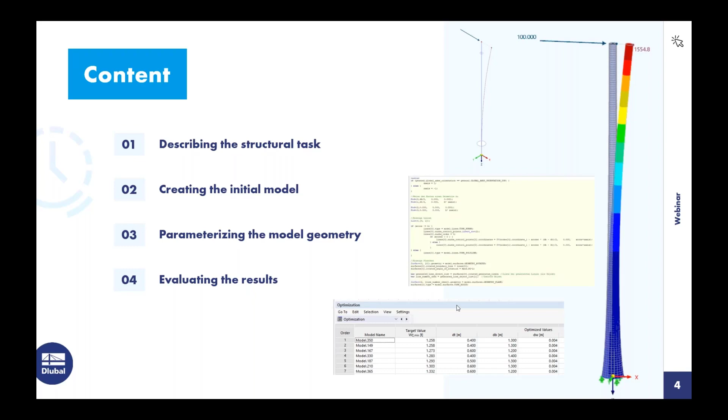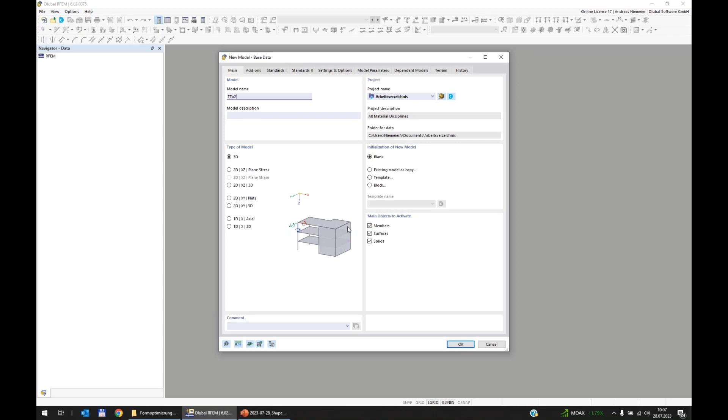I use a 3D model with all elements. The Z-axis goes down, but that's irrelevant for this task. What's more important is what our calculation tasks are.

Because we're talking today about optimization, I turn on the optimization add-on. You see here it's not just an optimization add-on, but more or less an optimization and cost CO2 emission estimation tool. A quite long name, with a lot of information. Why we also mention costs and emissions here, I'll tell you later.

For costs, you also have to define not directly a unit but more a currency, because we don't really have a place for it, so we define it here. For example, we use euro, and it should be written behind the value, but this is only organizational stuff.

What's more important, as I described with my structural task with this tower structure, is the target to find a structure with minimum weight. The question is, what are my limits? We can say it's deflection according to any standard, or yield stress, or whatever.

So it's your turn to decide which design checks you activate here. If we activate stress strain, the optimization considers stress strain. If I also activate steel design, it also considers steel design according to the standard you check here. So it's really powerful what you do here.

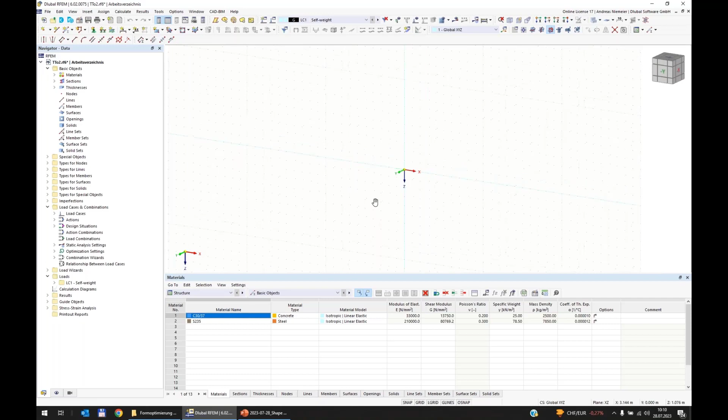So I use my XZ plane. I model the structural element, this 15-meter long structural element, only by a line. I don't define any cross section or anything else, because this is open at the moment. I only define what is given.

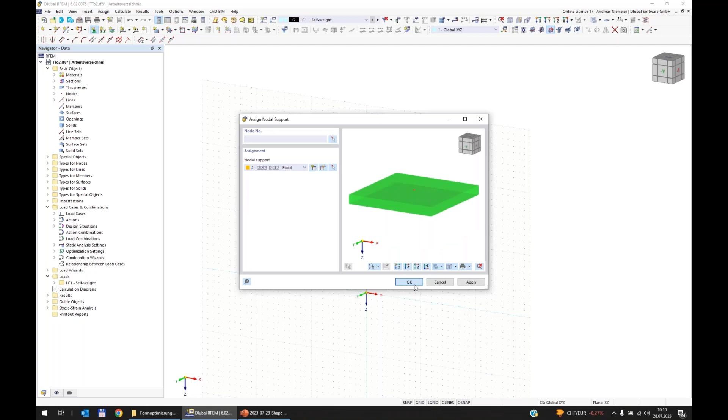We have some clamping on the bottom, let's say a fully compatible support. So I take over bending moment, shear forces, normal axial forces, all three forces, and three rotations should be fixed here on the bottom. Then we have a shear force on top, 100 kilonewton.

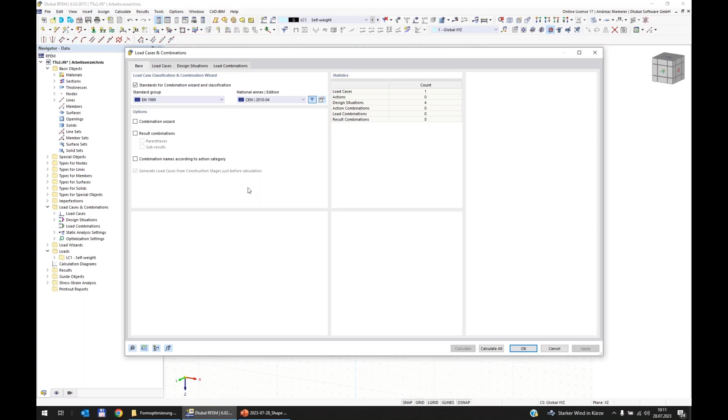For this, I define a load case, load combination scheme. I open the load case combination settings and start from the base tab. Here I deactivate the wizard because for my task today I only want to optimize it for the 100 kilonewton shear force on top. Of course we can use more, but it only eats more time. For showing you the logic, it's absolutely okay.

The next is, of course, load case. We give it a name, maybe horizontal load. We deactivate self-weight because this is uninteresting for this demo. We say, for example, here it's coming from wind.

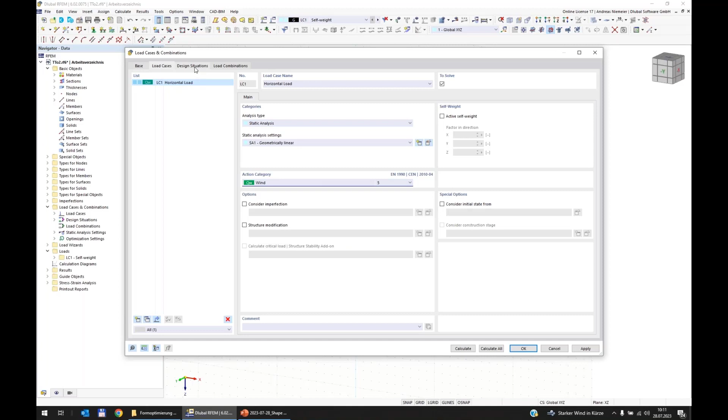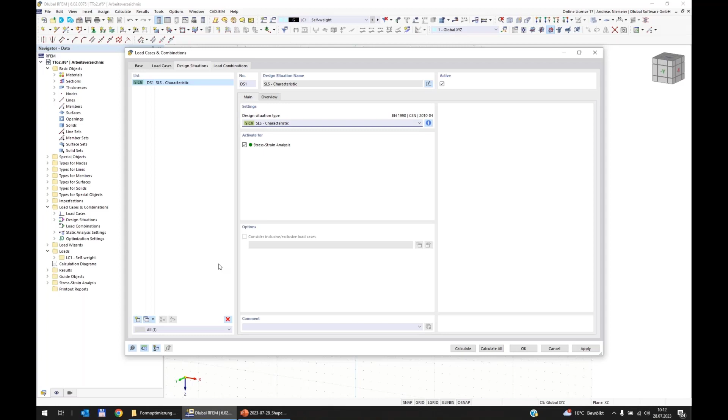Now we create a design situation for the stress check. Here I delete the standard created stuff and create a new design situation, characteristic one, where I activate the stress strain check. This means every load combination under the topic DS1 will be checked according to stress strain. And here I place one, so I create one load combination, a linear one, geometrically linear, considering load case 1. So this is everything we're doing here, and confirm the setting.

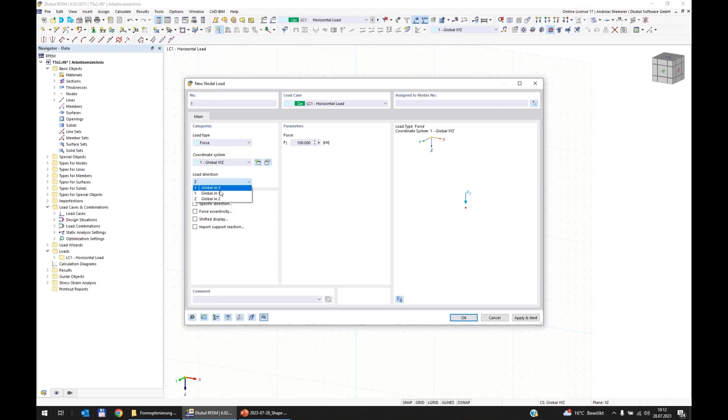And now we can specify the load, 100 kilonewton, in load case 1, into the right direction in X, for example. Of course you can consider more, but this only makes it more complex.

So now we have modeled all boundaries: the restrainment on the bottom, the force, and the length of 15 meters. Now we can start creating or modeling stiffness, how we can transport the force here from the air to the bottom. So as an engineer, I would say let's place a member in a structural finite element program.

So this is the easiest task. I go into the properties of the line and assign a member here. The program opens the member dialog for me, asking for some information about the member. Of course, I can use a cable here, but that makes no sense. So I take a beam, which can transfer all forces in all directions.

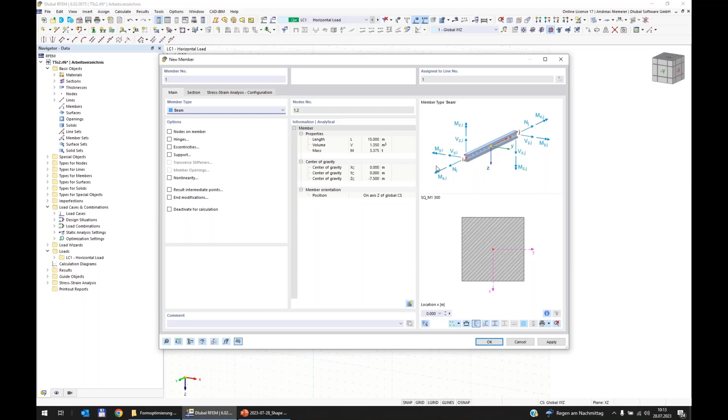And in the next tab, I define the cross section. Of course, I don't want a concrete cross section here. I want some circular hollow section, as was written in my structural task.

So here I specify first the material. I open the library, delete the filter, and write, for example, S355 material according to Eurocode, and I select this steel because it has, for my task, a good yield strength where I can go to the upper limit, and this is maybe my condition for my optimization.

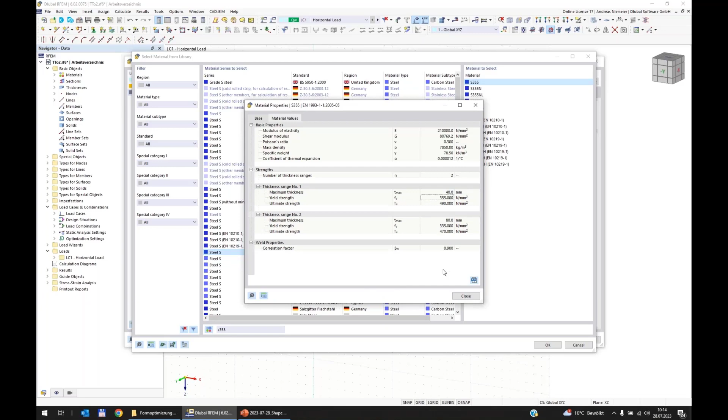Of course, I can also optimize different materials if you see this long list, but I fix this as a fixed variant. So I select steel, and now we assign a cross section, a circular hollow tube section from steel. Now we come to the first point, the plans, where we have to define two properties: a diameter and a thickness.

The question is, what should I change? The thickness or the diameter, or is this already enough? Should I increase it, decrease it? I don't really know, let's say. This is the first point where we, as regular users of the program, do some optimization.

What I would do now is, I know we have 100 kilonewton on top and the length of the tower is 15 meters. So I expect a bending moment on the bottom of 1,500 kilonewton meters. This 1,500 kilonewton meters, I believe, is really deciding for this structure. So we should find a cross section that can withstand or carry this load.

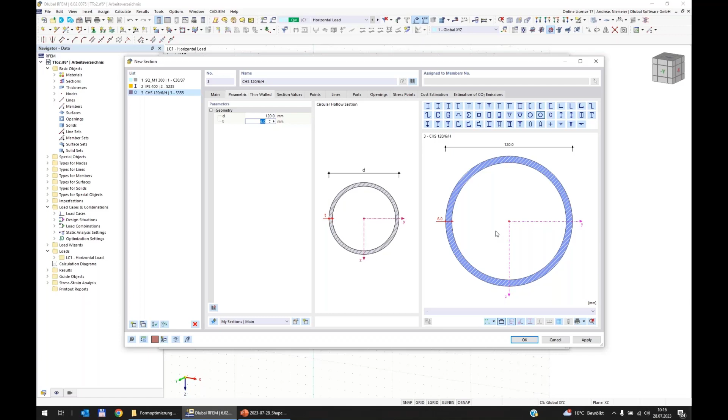Now the question again, I don't know if this cross section with 120 millimeters and 6 millimeter thickness can carry the 1,500 kilonewton meters. Here we have a small feature implemented, what is really not visible, but is really helpful. For this, I increase the dialog so you see everything. And maybe you realized here is a list box.

If I pick it, we have much more stuff here. The program offers unit stresses for different load types: bending moments, torsional moments, warping moments. In my case, it's the bending moment that's interesting. Let's say the bending moment about the z-axis, Mz, for 1 kilonewton meter, and I get a stress layout if I apply 1 kilonewton meter on this cross section. You see we get a compression of 70 Newton per square millimeter and here tension of 70 Newton per square millimeter. This information helps me find a cross section for this 1,500.

So if we know we have a yield stress of 355 Newton per square millimeter, and I divide this by 1,500 kilonewton meter, I get a new unit stress of, let's say, 0.23, 0.24, around about. In this case, we have 70, which is much bigger. So this cross section cannot handle this 1,500.

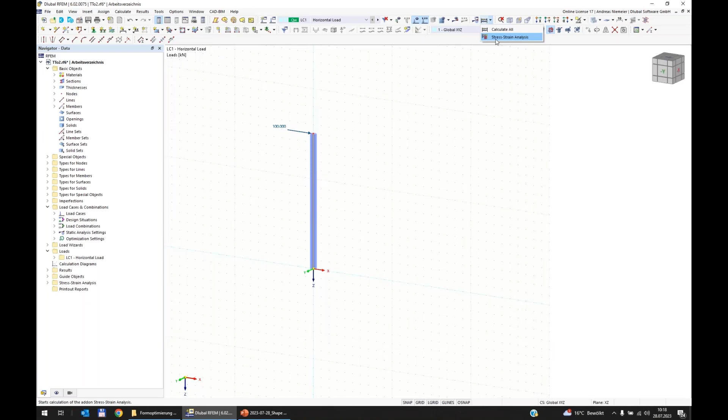Let's try. After our first optimization steps, which we did manually of course, let's run the stress strain check. The program calculates internal forces, does the stress strain check, and finally you get a stress ratio curve. We can increase the stress ratio curve, and you see, oh super, we have a utilization of almost 1, because the unit stress will fit our value exactly.

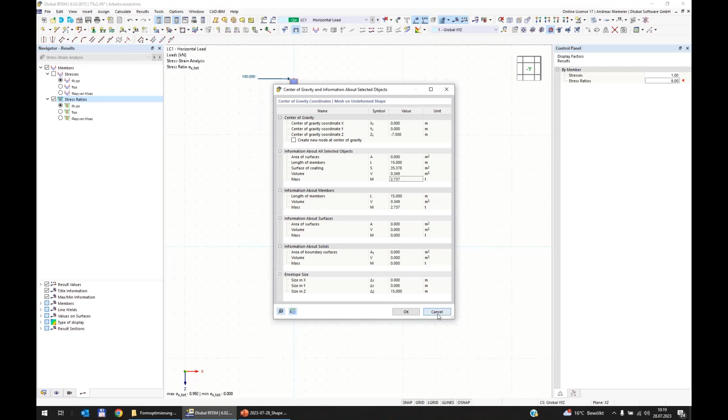So this was our first optimization, and we might think, oh, now our job is done, we optimized the structure. This structure has a weight of 2.7 tons. Well, I have no feeling whether this is much or not. Let's think about it — maybe we try a second variant to see if this is a good solution or a bad one.

So I open the cross section again, and let's change the thickness to something smaller than 1 centimeter, for example 6 millimeters. You see the unit stress increased, so we have to increase the diameter again to get a matching unit stress.

So we increase it to 800 — still too big. To 900 — still too big. To 1000 — now we find a solution. It's smaller than 0.23, so let's take it.

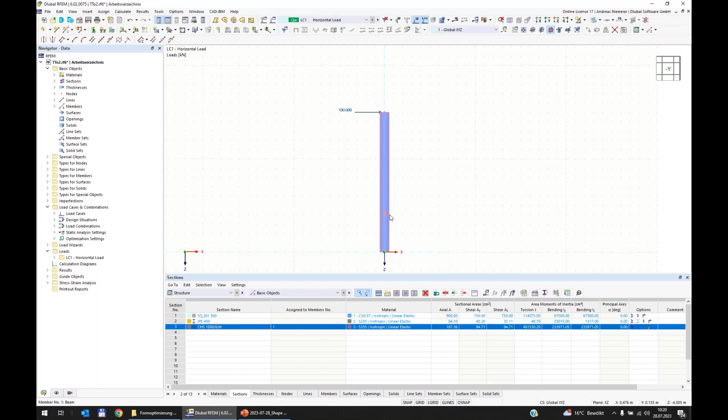But now I expect not a utilization at 100%, maybe 90 or so. So let's place it. Now the blue shading is a little bigger, but let's run the stress check again.

You have to calculate the internal forces again because we changed the stiffness. Stress check, and now we're at 90%. So utilization is not complete 100%, but we get a valid design.

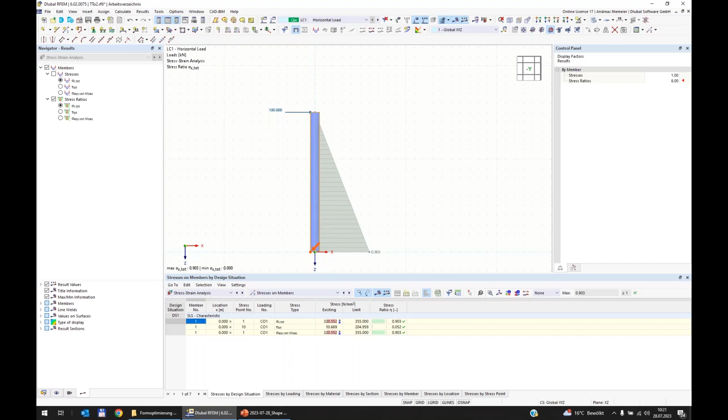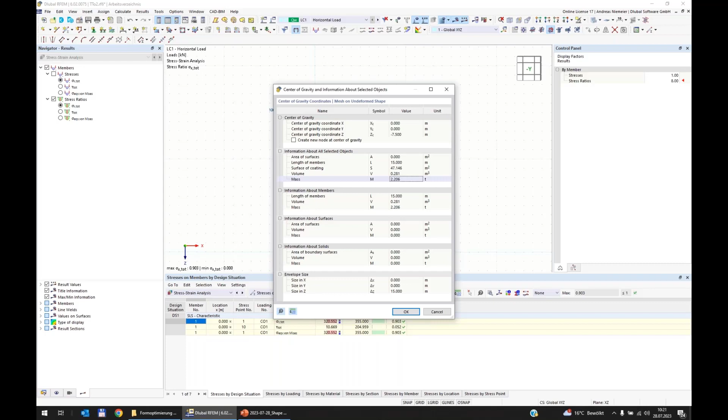So it's good. Now let's check the weight and center of gravity tool, and we see now we have a weight of 2.2 tons. So we saved, let's say, almost half a ton. So the question appeared, our previous design was not so good. We can handle the forces, we have a better utilization, and it's not so heavy. So now the question can appear, is also this 2.2 ton solution good or not, or do we have more potential to optimize this structure?

And for this, if I watch this diagram, maybe I would say, okay, on the bottom we have a utilization of 90%, but on the top where I have this big cross section, I have almost 0. So is this a good design? I don't think so, because I believe it's a good design if I use on every place of the member the full utilization. So we can decrease the size on top.

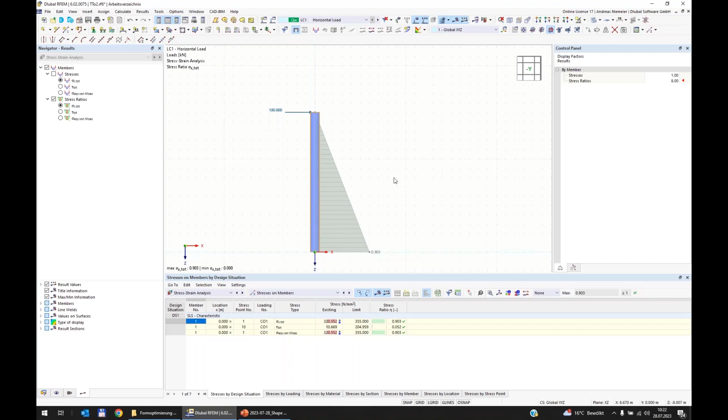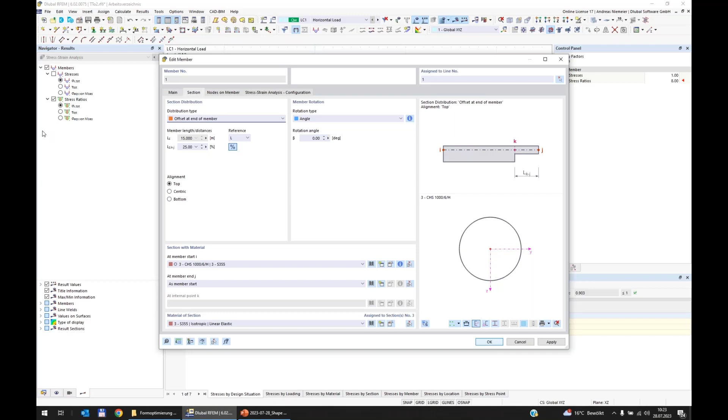Let's try it. So we change the cross-section distribution over length. For this, we offer in the program, below the section tab of a member, a distribution type. You see we have here uniform, what is constant over the length, but we have also here linear, where I can change the cross-section linear over the length, or tapered at both sides for a steel frame, on one side, on the left and right, maybe in the middle. Here some offsets on left and right, and so on. And I can promise you our team is working and you will receive more types here.

But let's use the simplest distribution, the linear distribution, and say okay, we have a different cross section on node J. Let's open here the library, go again into the cross section of circular hollow tubes, assign here our steel, and use here again these unit stresses to find a good cross section on top.

So what is our condition on top? We have 0 bending moment, so I don't have to check bending stresses here, because on top I have, let's say, no bending moment because I introduce only load. So we have a shear force.

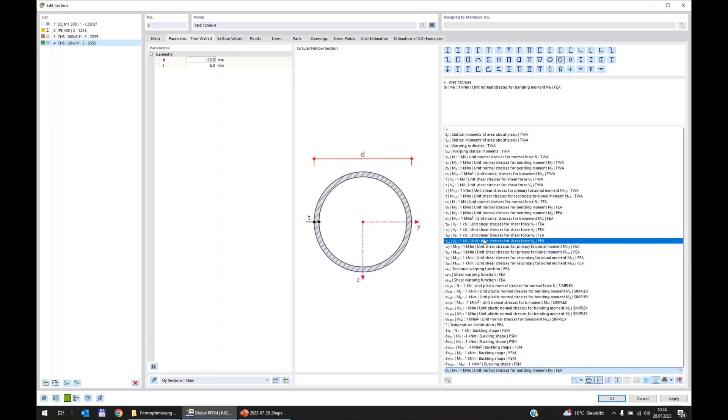So if we want to check shear force in Y direction, in X, Y direction, let's open the scheme here. Shear force, where it is, VY in XY. Yes, then we see if I apply 1 kilonewton, I get here a shear force of 0.9, almost 1.

If I make a check what is my most critical unit stress, if I use the yield stress divided by a square root of 3 divided by 100 kilonewton, I can accept cross sections up to 2.05 Newton per square millimeter. So this is smaller. So this cross section can take over the shear force of 100 kilonewton. So let's make it smaller. So minimum is 100 millimeters and the thickness remains.

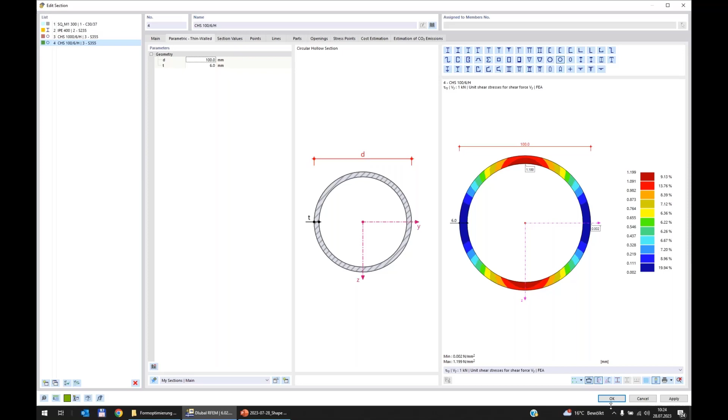Let's place it on the second place. Oh, we have here eccentric, so let's use centric. And okay, so the member is now looking like a peak.

And if we run now stress check, we hope we get a good design, because now we optimize cross section on top and on bottom, and we get now a strange utilization diagram. We see it's green on bottom, we see it's green on top, but in between it's red.

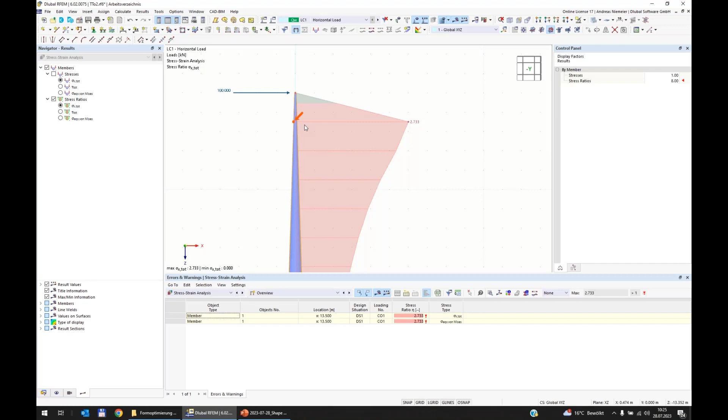So, oh, it's a bad design. Why? Because the spanning moment, what happens here on these places, for this cross section is too small, and we have a higher stress than the yield stress. So we have to, let's say, increase the cross section here in between, or we increase it on top to receive here a better design in the middle. So this is my only chance at the moment with this element.

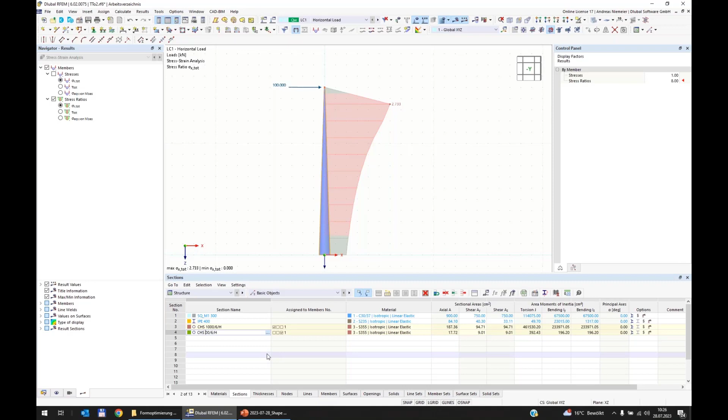So I go back to cross section and increase here, for example, the size of the top cross section from 100 to, let's say, 300. Run again.

And I still want to say this is a manual optimization what we are doing. We're changing values with the hope it fits. And oh, unfortunately, it don't fit. We get a utilization 10% over the critical limit. So let's make it a little bit bigger, maybe 350.

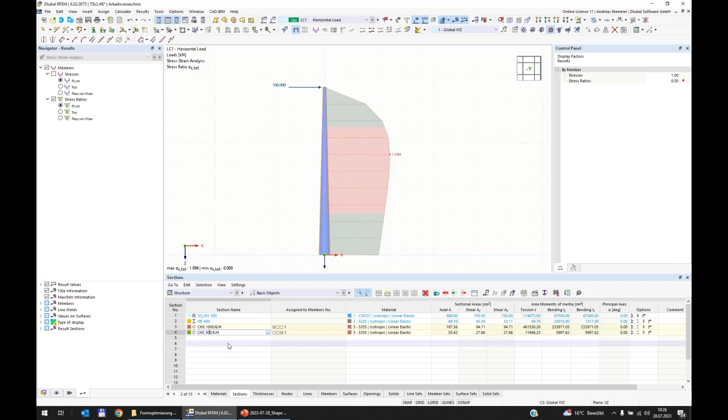And if we run it again, we hope again it fits. So we optimize manually and change these parameters, not really knowing if this is a good change or not, but now it looks good. So we have almost a 1 utilization. So I would say design is good.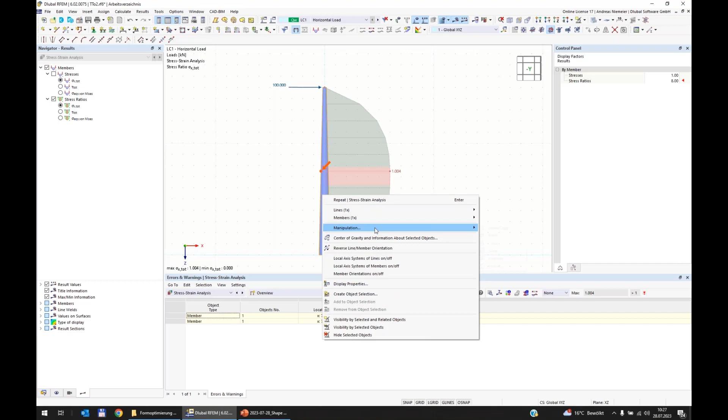Let's take it. And now let's check what is the weight. And if we check the weight, we see, oh, we get now a really big change to, let's say, about 1.5 tons. So before we had 2.2. So we saved a lot of material and following also money.

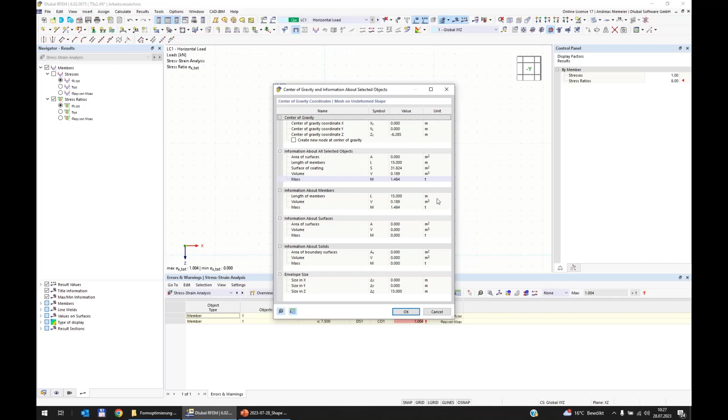And now we can think this is now a good solution. Now we can go into serious production with this element. But when I take a look on this diagram, it's non-linear curved. It's not linear to the changing cross-section geometry. So an idea could arise.

Could there be a solution that when I distribute the cross-section over length a little bit different, that I can save more material? Maybe, maybe not. Let's see. And this is now the point where I bring into our discussion the numerical optimization. And for this, I want to explain you something.

I delete here especially this stuff, because I just mentioned I have with a member no more option to change the cross section over height or over the length. I can only do it, let's say, linear, but when I model it like a shell, so with a surface element.

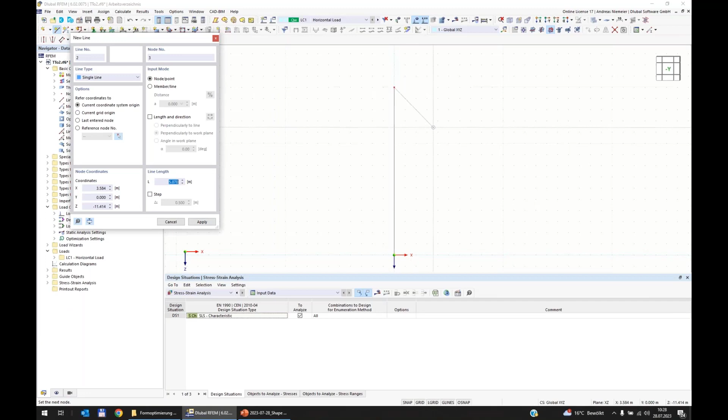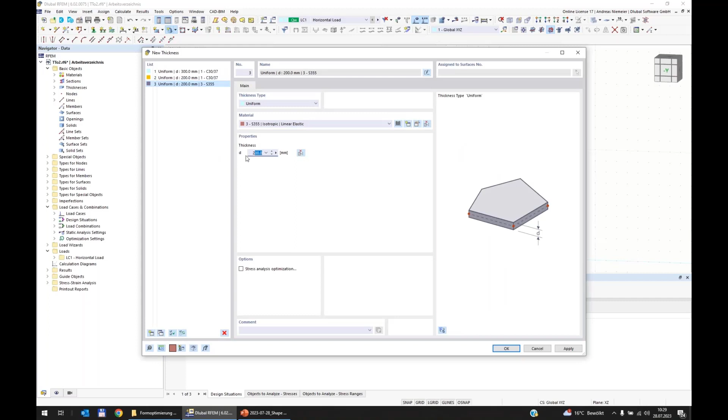So this is maybe my beam axis with 15 meters, and maybe I draw here the outer skin, and I rotate this linear changing line, and I apply here a rotated surface. So for example, here with a steel surface with 6 millimeters, rotated about this axis, I get a conical shape, something like what we have with the beam.

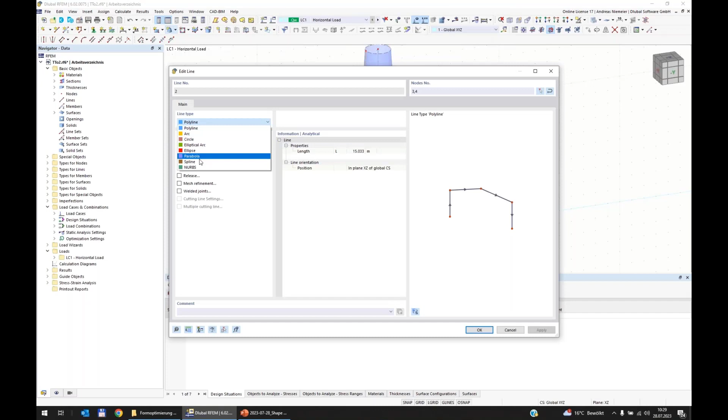But what happens if I say now this surface here, you are not a polyline than a NURBS line? This line have a curve over its length. I confirm it, nothing happens because this line have only 2 points.

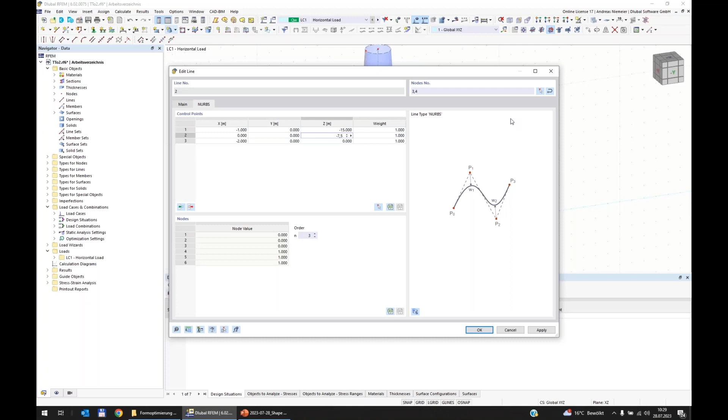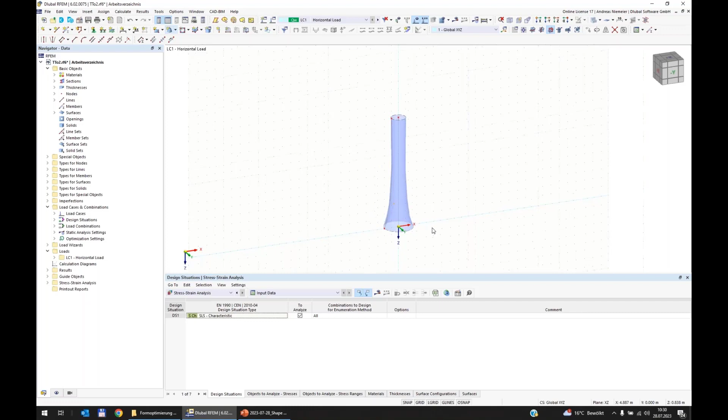So if I add here one additional point with maybe an order of 3, and I place this node in the middle, 7.5, and I confirm it again, you see I can change the conical shape, similar like the member, now over the length non-linear, maybe according to the curve of the utilization. And now you see I have here a node, and if I change the node, I can create any shape what I want. And imagine now we optimize this place of the node according our loading of the tower.

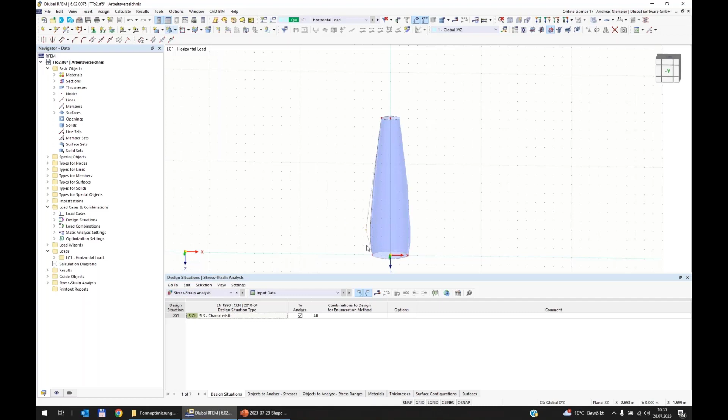Is this inside, outside? So we get a chance to model a structure which have a different distribution of stiffness over height. I use, or I wrap for this the shell elements. But for me, it's important now, we have now a new parameter.

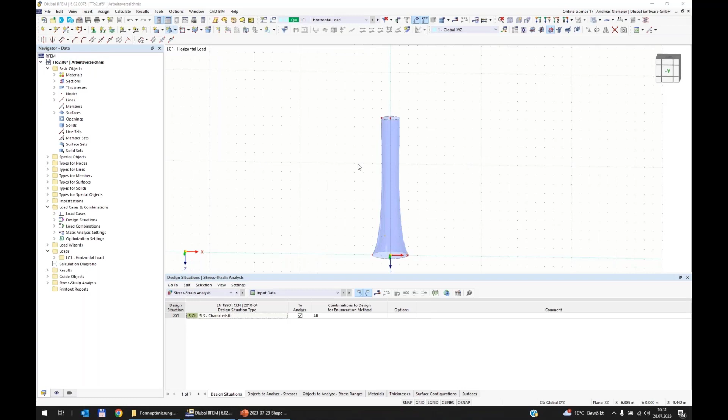Let's say I say - what is the right name? Not consistencies. It's... moment, I have to search. A constriction, sorry, a constriction. So if we can consider in our parameters also a constriction, maybe a x-level constriction with a direction of a constriction.

And now we give the computer the hand of this constriction point, because this is now, I can always change the point, run steel design, check weight and utilization, and if it's good or not. So we have a lot of situations here. So now this is the point where we can try to start if this could be numerically solved.

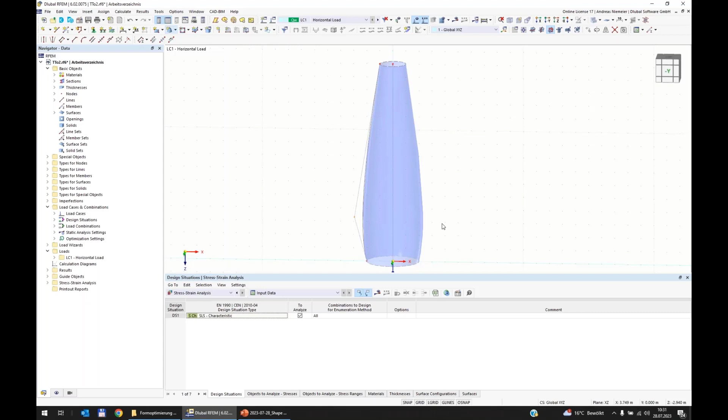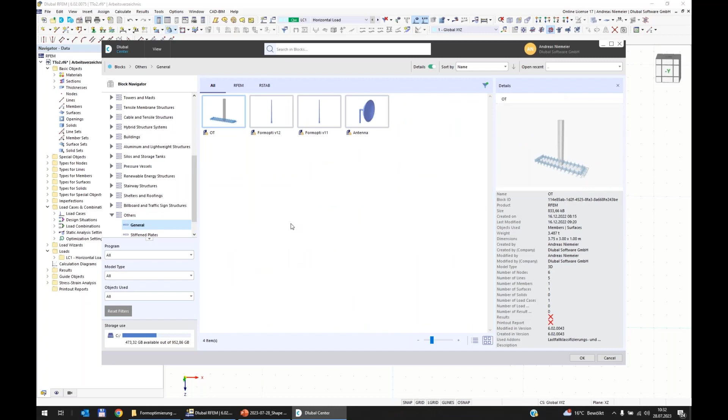And for this, I prepared something. Let's delete this again. For this, I prepared a block for this demo today. And in our blocks, I stored it below the category other, general. And here I used a block Formopti version 12, because I changed all comments into English here. And if I open this block, it's something like a RFEM model inside a block scheme. And if we open it, you see now directly what I want to mention.

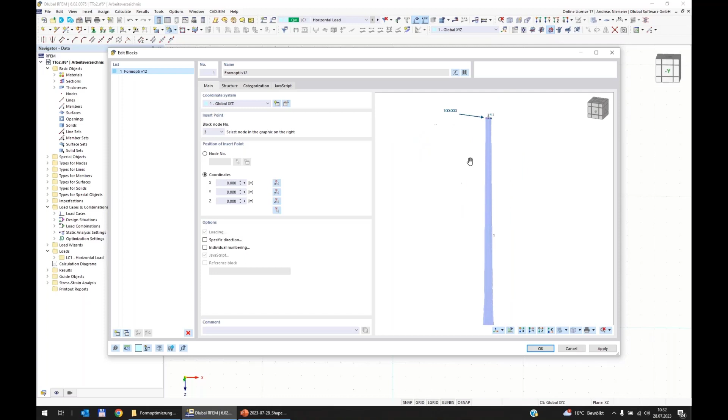I have here now a block, having the shear force, having the shell, maybe restrained on the bottom. Here he have a rigid plane, what is distributing the shear force on the tower structure. And here we have organization that this block is referenced to node 3. Node 3 is here on the bottom, and I want to place it here in the origin of the, let's say, model behind. But this is only organizational stuff.

Much more important for us is now that we have here a JavaScript option. What is behind? I show you now. We have here a structure input, and you see, strange, the program knows that I have a diameter bottom, diameter top, a high, a constriction, the word what I don't know just before, the wall thickness. And the question is how the program can know it.

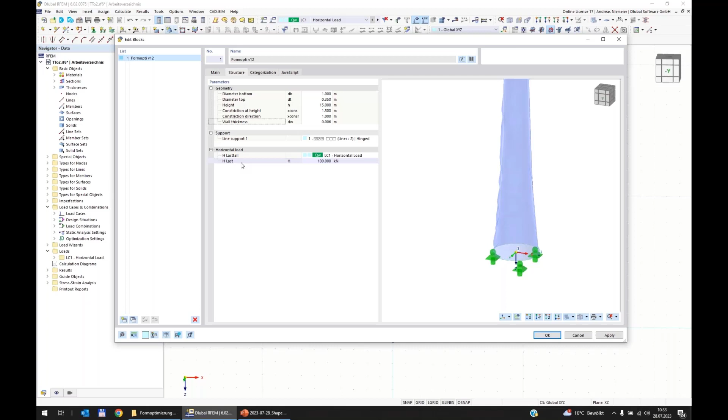And everybody can say, yeah, of course, now Dlubal can present some internal coding, but this is user-defined. You can create it by your own. And now let's take a look at first how it's working. So if I change the bottom diameter to 2, the program is changing the bottom diameter. If I change maybe this NURBS point, the constriction at high, maybe at 5 meter, the node is changed. If I change the constriction direction to -1, it's changed. So we have now here a block what is doing its job according to these parameters what we're having here.

Now maybe the answer how we can create something like this. Let's go to the top JavaScript. And you see here is some coding stuff. It's JavaScript and it's user defined. We can open it and you can write it. So it's your turn here.

And what is important now here? This JavaScript code here is 2-part. We have one part, an input data part, running from here to here. And if you read it, we have a category geometry, diameter bottom, diameter top, height, constriction, wall thickness. So it's these parameters here, what we have.

And you have here an initial value. You have here a minimum value. You have here a step when I change the spin button. You have here maximum input. You know if it's a length or an integer or whatever. So you can define it by yourself.

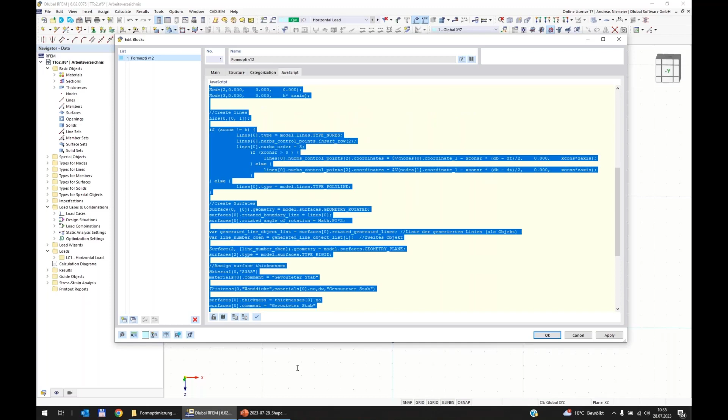And then we can use these parameters in a generate code part. It's the second part here. And here you see what we're doing. We're checking if the global axis is upwards or downwards. We're creating nodes on the outer hull of the tower, maybe on the bottom, on the top. We create the node on the origin, we create the node on the top origin. We create lines between node 0 and 1.

If we have maybe a constriction, then we create the NURBS line. If we have no constriction, we create a polyline. We create the rotated surface, we create this rigid surface on top, we assign a thickness, we assign supports, we assign a loading 100 Newton, kilonewton. And this you can make by yourself according to your structures what you have to optimize.

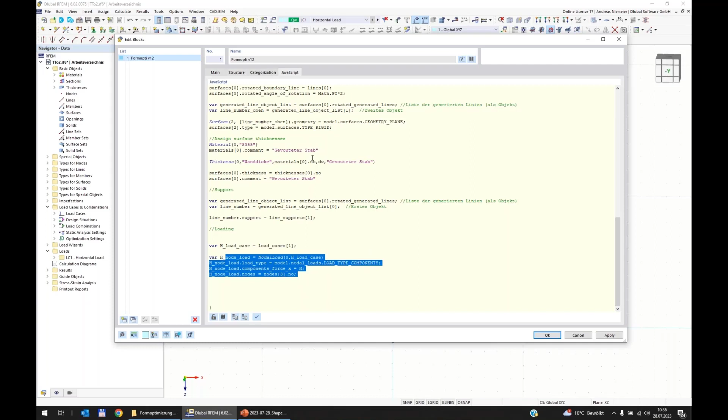And if it fits to you, let's place it now with maybe the inputs what we created manually. So we have a constriction of 15 meters, one conical shape, and now we can place it in the RFEM model. It looks now not really special, but the power is now, if I draw with my mouse above, you see we get a highlighted rectangle above.

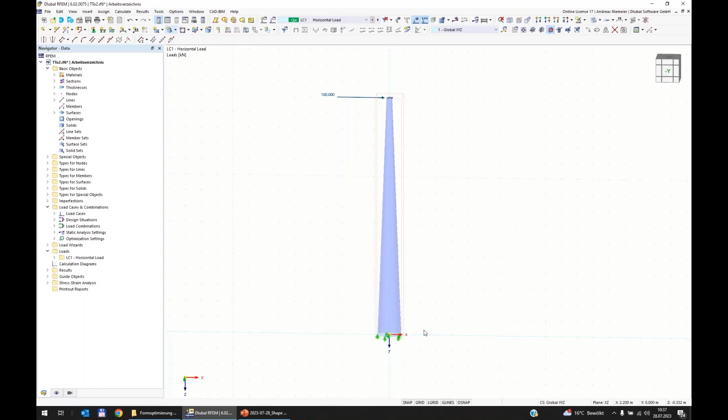This means I can open it again as a block with its full logic with code, and I can change it, for example, to 1.5. And if I confirm it, the program is changing it to 1.5. So I can change parameters afterwards, even after I already imported it. And this gives me now the power that I can connect it to a numerical optimization process.

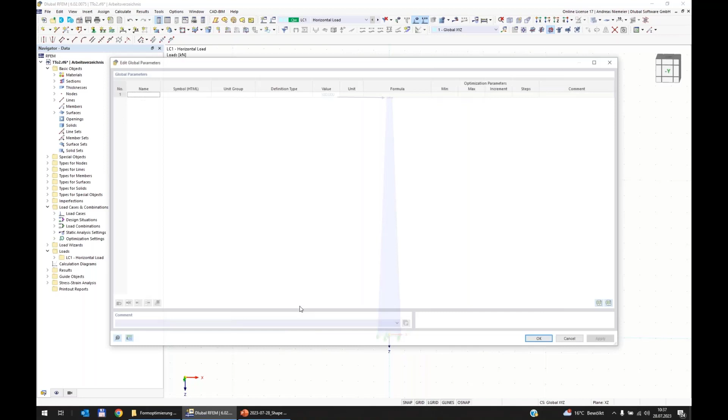This you can connect with global parameters. The global parameters are hidden here below edit on the bottom, global parameters. And now we have to describe to the computer what he should optimize numerically, because we have now a model where the computer knows what could be changed in which way, and now we connect it.

For this, we write here parameters dt for diameter top, then db for diameter bottom, then wall thickness, dw for wall thickness, then the constriction, the x place of constriction, x cons, for example, it's the x place. And finally, the direction of the constriction, so direction constriction. So now the question could appear, why do I define now all parameters again in this list here, all sorts, I already have it here in my block.

Formopti v12 here. Of course, the question could be, but you have to know that this is the block. It's working for this independently. And now I have to connect it to my global RFEM model. And for this, I specify these parameters a little bit more. I define now the definition type.

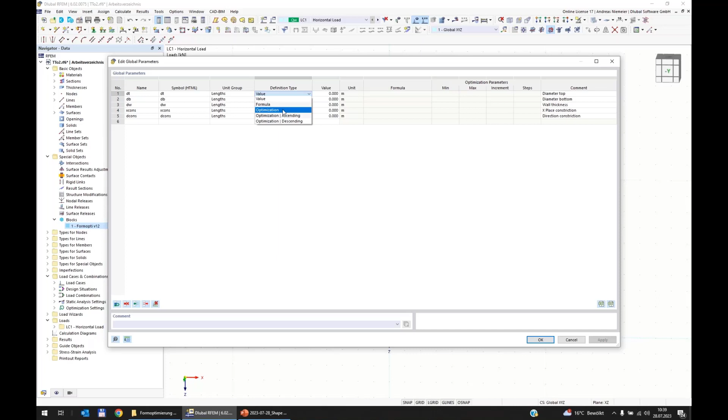And this is the first part when you see the effect of the optimization add-on when you activate it, because then you have these optimization types. I say here the optimization. Now you see it's going red. Why? Because you need more information. The initial value is now here.

It was the top 0.35 we optimized previously in our manual optimization. And now we have to say it should run from 0.1, 10 centimeters. So we go in negative direction with 25 centimeters, so also upwards. So let's say 0.6 meters, and we have steps of 10 centimeters. So the program can use 0.1, 0.2, 0.3, and so on until 0.6.

For the bottom diameter, we do something similar, optimization, and we say initial value is 1 meter. And the minimum, let's say we want to let it at 1 meter, and we let it increase until 1.5 meters, with steps of 10 centimeters again.

So for wall thickness, we place here 6 millimeters. And we say minimum could be, let's say, 0.4, maximum 1 centimeter, what was given, so 0.01. And to be near practice, let's jump always 2 millimeters.

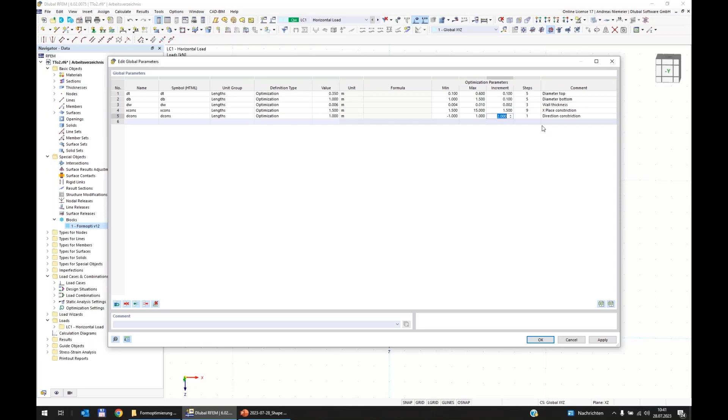And finally, we have the direction, and the direction, let's say it's 1, and it can run from -1 to 1 with a jump of 2. So now we specified how the parameters can change numerically. We give them a design space, and in the next step, we have to connect these parameters with our block. So I open the block and say the bottom here is the bottom.

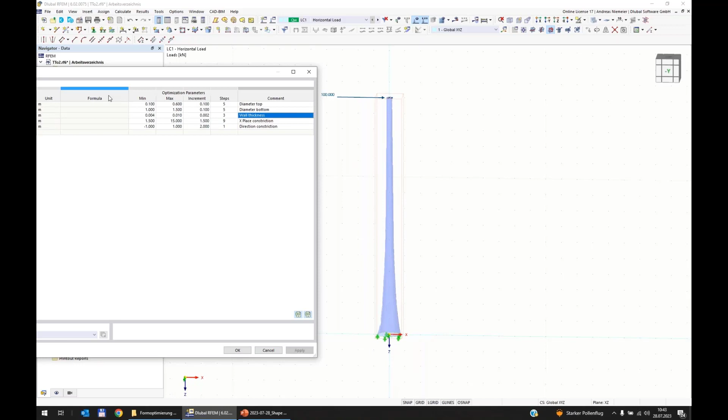So you see with this yellow rectangle that we defined a connection here. Now when we change a global parameter, for example to 1.5, I change it in the window, apply it, and the program changes the block by updating the global parameter. Now we get the block in our numerical hands.

This is the point when I open the optimization tools. So I go to calculate and open the optimization settings, and you see here our good old known optimization global parameters with its steps, and they are giving us 2880 mutations. These mutations - let's say this isn't something connected to X-Men from Marvel - we describe as a specific set of parameters.

This means if dt has, for example, 0.35, this is 1 meter, this is 6 millimeters, this is 15 meters, this is 1 meter - this is one mutation. If I change, for example, the bottom to 1.5 meters, then I have a new mutation. All these states result in 2880 solutions.

To get the best result, for example the mutation with the lowest weight, I have to calculate 2880 solutions, which means for me 8 hours. Because for one solution or mutation, the program needs 10 seconds - it has to calculate the internal forces, the stress check, and this takes, for example, 10 seconds. If I multiply it by a factor of 2880, I get 8 hours. Just to keep in mind.

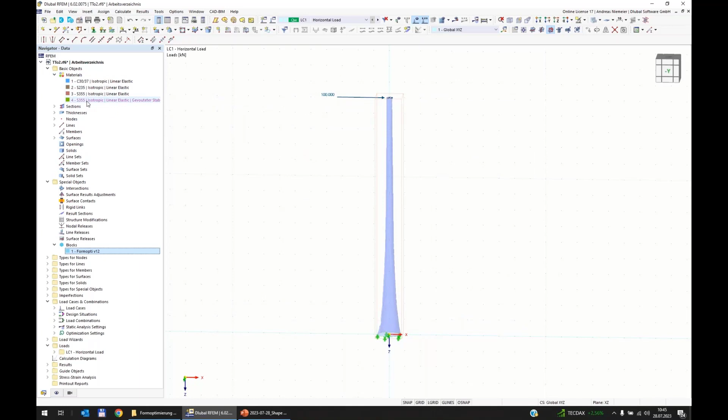With this activation of this optimization add-on, below the material properties we get some options: estimation and cost. If you look at cost, you can specify unit costs for members, per weight, per volume, per surface. Now here is a standard value of 1, but if I change it to 1,500, you see the costs will be updated according to these unit costs.

And if I say maybe painting cost is also 20 euros per square meter, we can increase the values here according to this input. And you can now imagine if I change the diameters, bottom and top, the figure will change according to this quantity, which we get from our geometry itself.

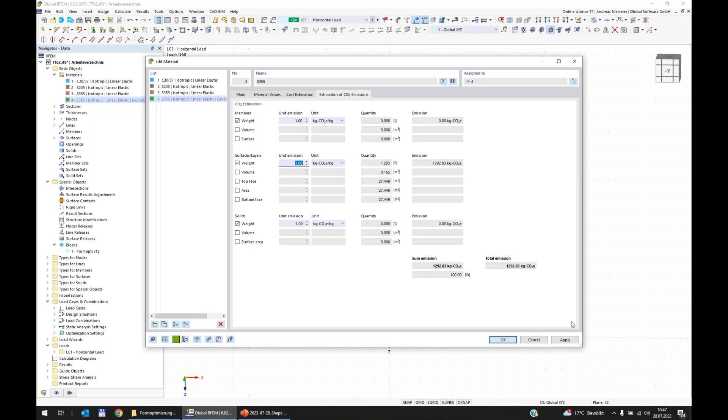And now if I do optimization, I can also rely on this total cost or on this total emission, where I can define per weight this and this emission. So this allows you to set up a specification according to emission or cost. Instead, today we're using minimum weight.

Of course it takes 8 hours - I did it last weekend, on Saturday the computer did this analysis, therefore I know it takes 8 hours. Of course, if you increase parameters, you will get more and more, maybe 1 million mutations. And if you have more load cases, even the single calculation takes more. So we can also speak about days and weeks.

So at any point, if you get more parameters, it makes no sense to calculate all mutations. Then a second method comes where you say maybe 10%, so you can change the percent of mutations parameter. For example at 10%, you try to find a good solution by randomly selecting within the result space of 2,880 mutations. But this is random - it could find something, but it doesn't have to.

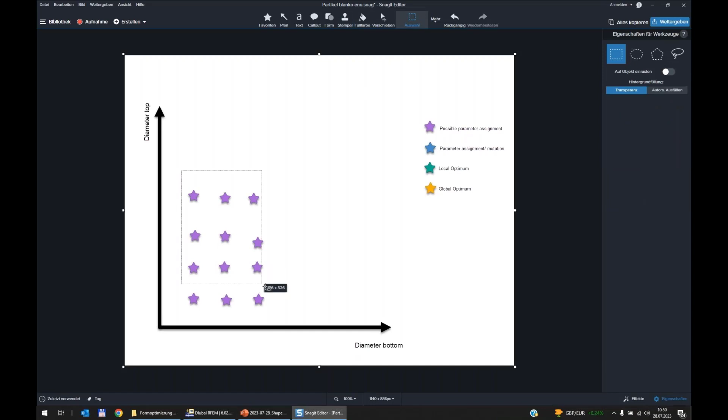So this results finally in 2,880 purple stars, and this takes 8 hours. What takes so long? Therefore, we have particle swarm optimization instead, so I delete this, and now the program goes ahead in another way. It selects random solutions, for example 2.

Internally, but let's say we start here for explanation with 2 randomly placed parameter sets. So maybe you see this bottom diameter and this top diameter, and maybe this solution. Now imagine the program thinks of this like a bird in the air or a fish in the sea in a swarm. What is common with such a swarm is that these individuals don't swim away from the others, they remain in a group together. What's also common is they are not staying in the same place, they are moving.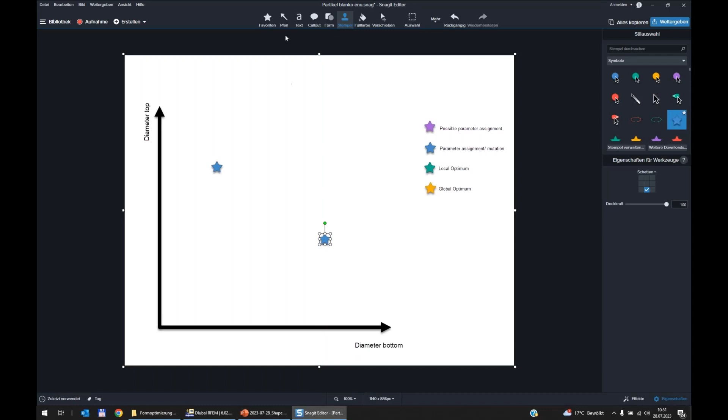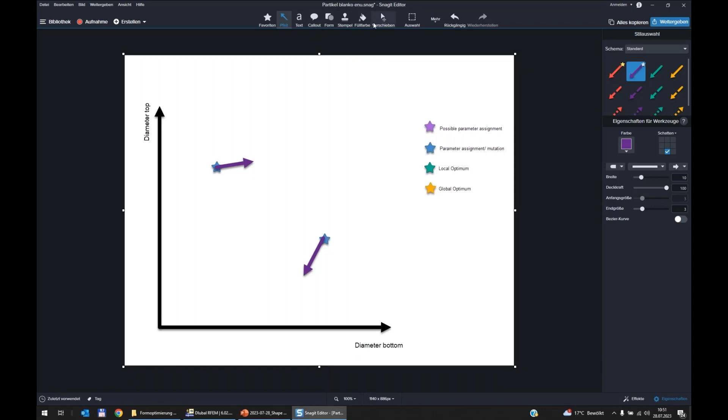If they are moving, this means for the program that it gives the individuals a randomly defined direction and speed in the result space. This means now, when checking the weight, like you saw before when I right-clicked on structure, we see if this is a good or bad solution. We also have here an expected optimum region, so let's say the expected optimum region is here.

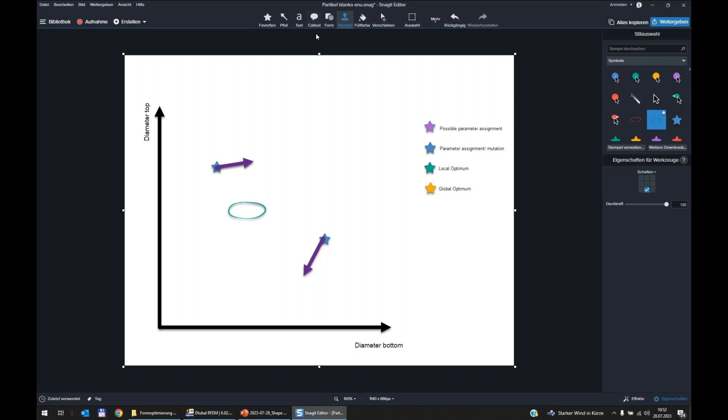If the program is checking the data for the next step, now the positive effect is coming. So we check the next variants here and here. If it checks whether this is good or bad, it sees this star is a little closer to the optimum, so it gives us a smaller weight, so it knows this solution is a local optimum.

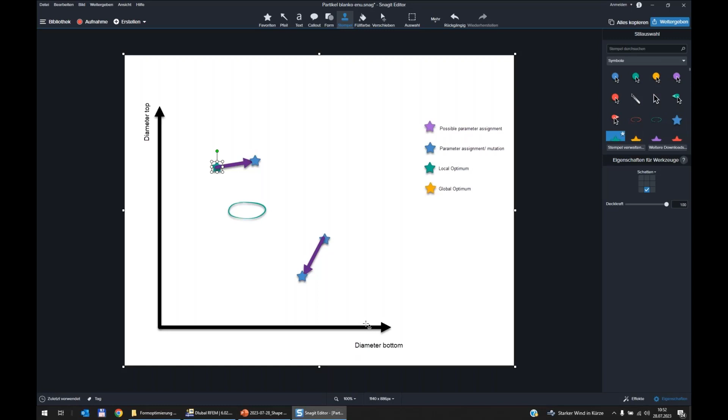And here it sees this is maybe also a local optimum. But finally it realizes this star is closer to our optimum, so this weight is smaller, so this is the global optimum.

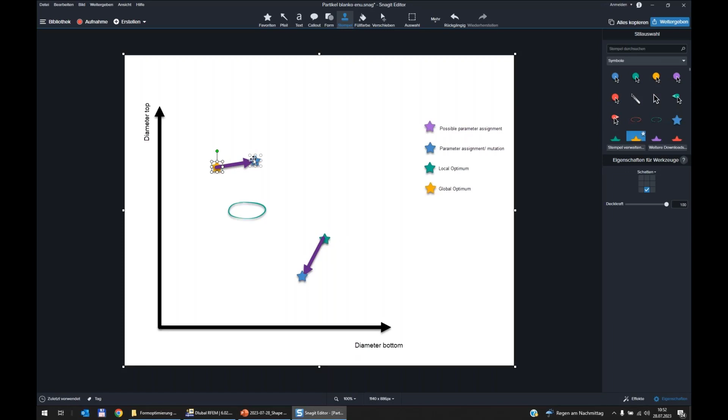Now it has to decide in which direction the bird or fish is swimming, and it swims, let's say, toward his local optimum and the global optimum, so it swims back. This fish or bird is now going to his own local optimum plus the global optimum, so a mixture of both.

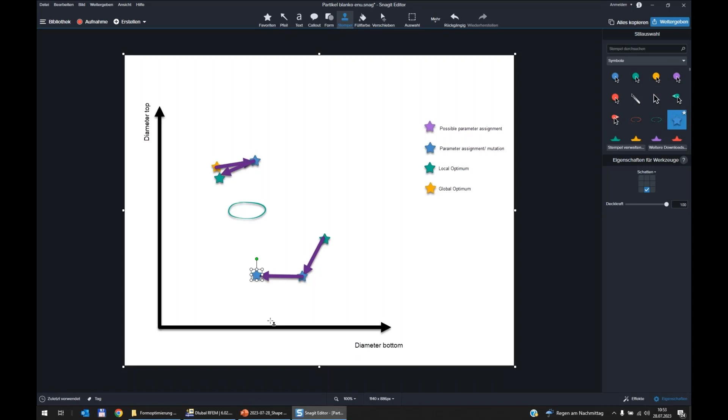Now again we have the next solution, so we go to the next set we defined. You see this solution is the next local, and this solution is the next local because we are closer, so it loses its previous state, same here, it's blue.

And the global is this one. In the next run, if it decides again, going in his own personal local direction plus global, he comes to this solution. And here again it's going in his local plus global. Now in the next iteration we come to a solution when we check it again - this one is far away, he'll come closer, so this is the next local best value. This one isn't so good, so this remains the local best value and still the global best value.

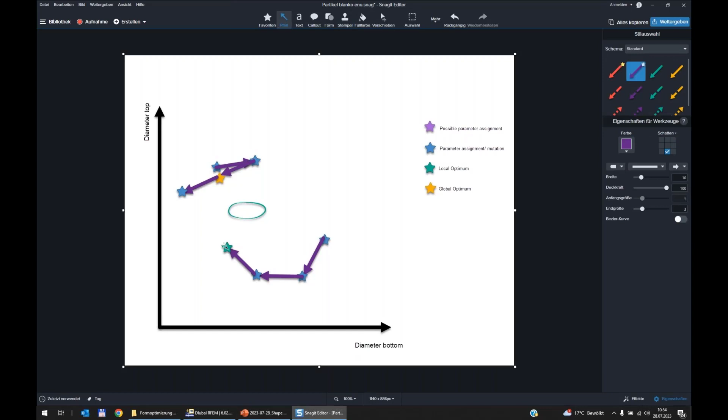Now you see this one will run toward his local best plus global, so he'll come slowly to the perfect result, and here he's running back to his local and global. So you see the program is learning according to his experiences, knowing the global optimum, what is the best fit of the parameter set, and you don't have to use 2880 solutions. It's enough for him to find good optimum results within a few iterations.

And it was really random when I started, this picture looks always different when I explain it. So now, coming to my last point, the results of our analysis.

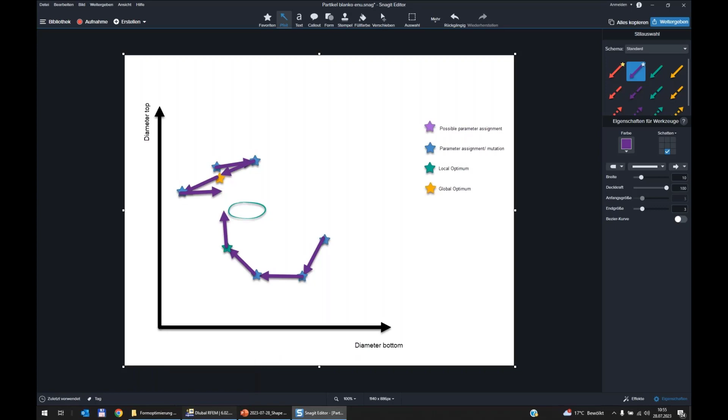If I use particle swarm with, for example, 10 or 20 percent or whatever, we get the following results. I made this diagram from it, and you see the first column was our manual optimization, what we did by hand - that took only seconds. The orange line is really down, and we received a weight of, I checked it, about 1.48, so 1.48, 1.5 tons around about.

If I use the particle swarm optimization method, with 0.78% mutations, this means 22 calculation runs at 10 seconds each, so about 4 minutes. We can decrease the weight to 1.3 tons, but this is pretty random.

Imagine my picture, what I just drew. If we increase the percentage of mutations to 1.563, always doubling, you see we finally come to a weight that's almost homogeneous, let's say 1.25 to 1.3 tons, maybe at 12 or 13%. This means 357 iterations, which took about 1 hour.

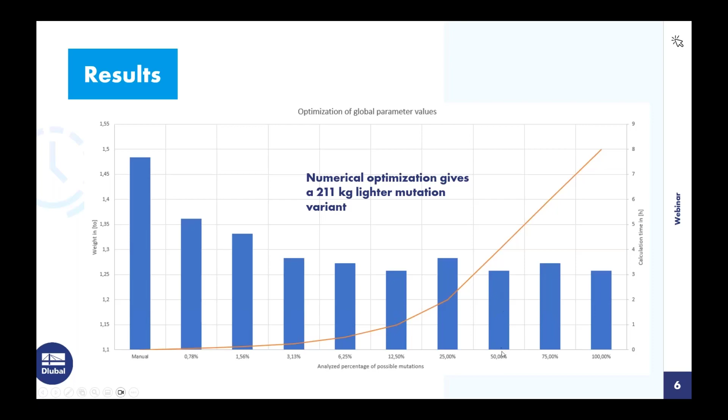Now I want to show you how this looks. Let's check this result at 50 or 12%. I stored all these results after the run. Opening here at 50%, you see the program found parameters.

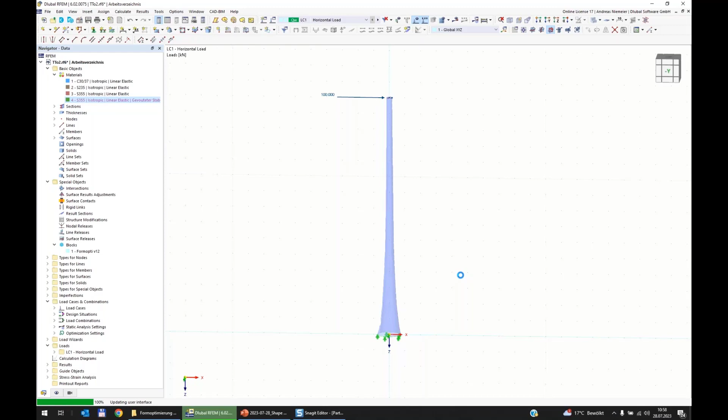Now you have to activate the table, and you see the optimization: the program found within the 350th solution a target value of 1.25 tons with a diameter of 40 on top, 1.3 meters on bottom, thickness 4 millimeters, no constriction since it's conical at 15 meters, and direction is irrelevant because it's conical.

The solution 149 gave us a similar value - same weight, same diameter, same thickness, same constriction, only the direction changed, so it's nonsense let's say. The second solution gives us a few kilos heavier, with top diameter 60 centimeters and bottom 1.2 meters, 4 millimeters, with a constriction at 12 meters in direction 1.

So constriction has some effects. Also direction, you see it's changing minus plus minus plus, changing also the Z placement. What really governs is the thickness - it is really sensitive. I think all 20 solutions I stored have only 4 millimeters thickness. So this is really a designing parameter, and the others also have some effects.

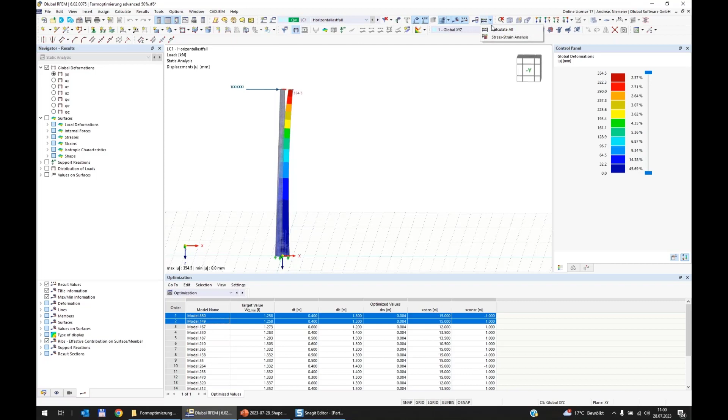But this is the result finally that you get from the program. And finally it sets exactly the best fit parameters and calculates the stress check. If you run the stress analysis, you should get a utilization smaller than one - here we have maybe 95% utilization.

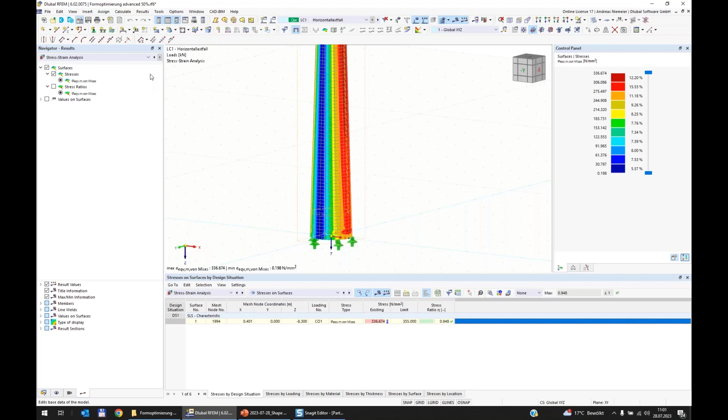This brings me to the end. I hope I could inspire you a little bit with this tool. It's really an exotic add-on, but if you're in the field of series production and need for your optimization the feedback from a finite element program connected - and this is the most powerful topic - to standards according to concrete, steel, timber, masonry, aluminum, connections also to standards worldwide, then you can use this feedback for the experiences of this self-learning process to find good parameters. I think you can use it for any topic where it's interesting to save emissions, weight, deflection, whatever I showed you.

And now I give back to Andreas.

Okay Andreas, thank you for a nice presentation. I agree, yeah, it's a very powerful tool, especially for constructions that are produced in serial and so on.